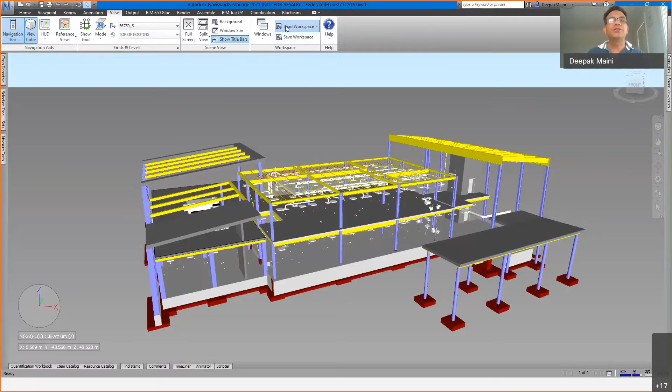And what I do from here on is I look at all the clash results that have been added to this file. So I'm going to go OK here. Let me move this folder out of the way. I'm going to go into the workspace that I've created for my clash detection. All right, so I've got all these different clash results.

If I go into, for example, structure versus mechanical, and look at my results window, I've also grouped all these clashes, so I can see them grouped as well. Similarly, if I click on structure versus plumbing, I'm looking at all these clash groups. So this one here is telling me that there are these 3 clashes and other clashes and so on.

So as I'm working on these clashes, if I need to have a communication about any of them, what we would do is, from Bluebeam Studio projects, pick up this PDF file and add it into a new session. As you could see, I've already got a session running for structure versus mechanical. I'm going to add this to a new session, and I'm going to call it structure versus plumbing.

So what it's doing is taking this clash report that was added into the project as a PDF file into a new Studio session. And in this new Studio session, I can then invite people. So let's go and type an email address. So I've invited this person to start working with me on this PDF file.

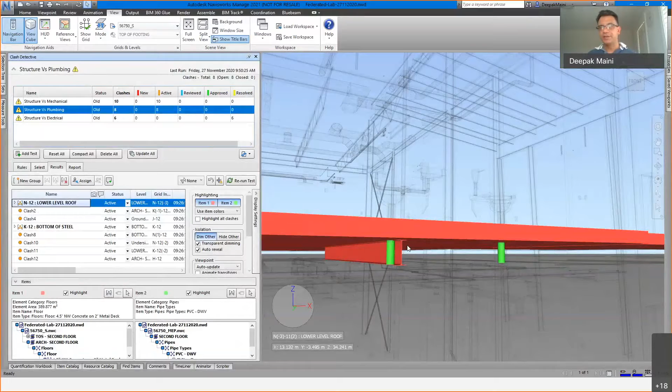So I'm looking at these PDF files, and as you could see, they've got the same clash groups as well as the individual clashes as I've got in my clash results here. So looking at this first clash, I can see it's between this pipe and the slab. And I want to say that these are valid penetrations, and we have decided not to model the penetrations in this project.

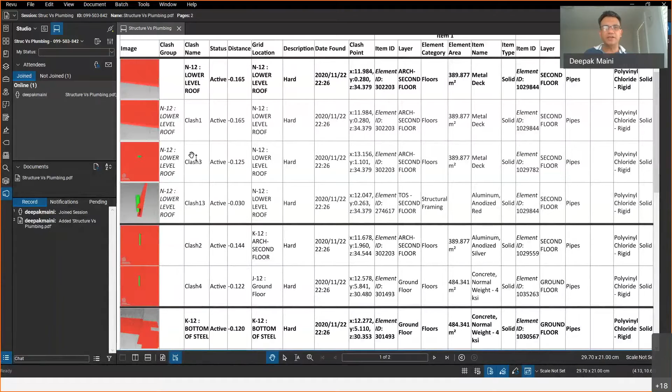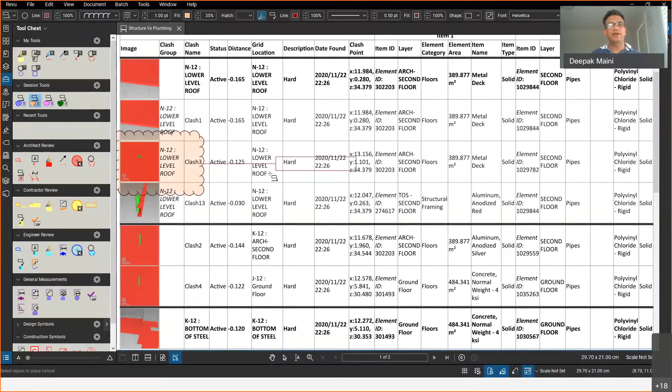So I could simply go into this PDF file here and start adding those markups. I'm going to go into my markups window here and pick my markup tool. Because this is plumbing, I'll pick the plumbing markup. And I can now add a markup here, and then add a comment: This is a valid penetration. We aren't modeling it in this project. So this is a markup added.

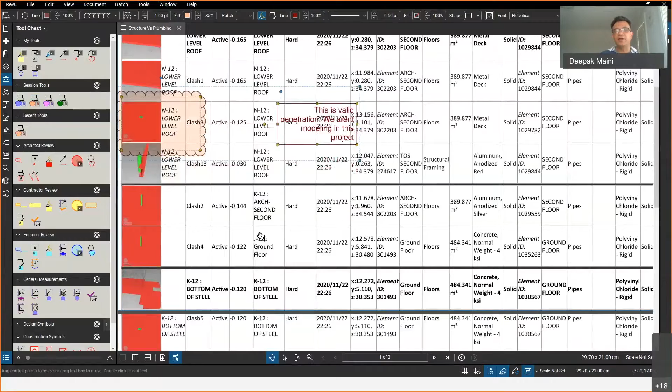Similarly, I can resolve the other clash. This one is again a valid penetration, so I could do the same thing with this clash. This clash obviously is a problem because it's with a piece of steel. So I can go into my model, move this pipe here, and then go into this particular markup and say: Pipe moved, changes will be reflected in the new model.

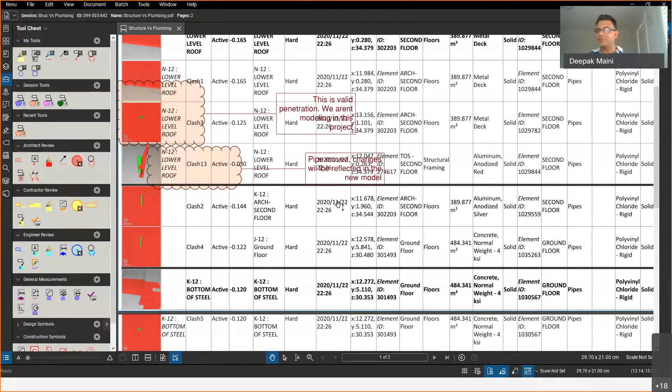So the whole idea is I've got this one single source of truth where I've got all the information that I'm adding, or any communication that I need to have with the BIM manager or the VDC manager about any of these.

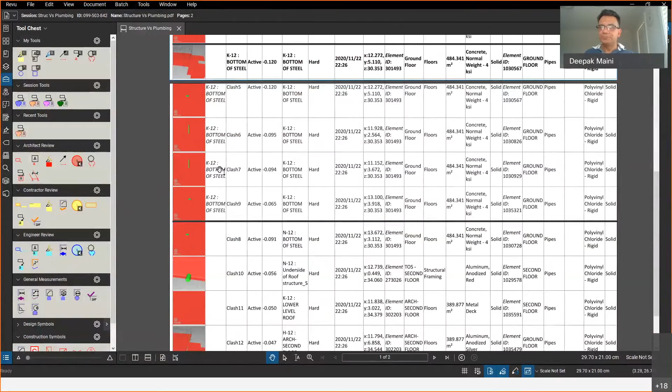Similarly, if I've got any other problems, I can start adding comments here. But most importantly, this combination of Studio Sessions and Studio Projects is ensuring that I've got a single source of truth for my Navisworks NWD files, because this is a read-only file, I can't make any changes to it. And at the same time, I've got a single source of truth about my communication as well.

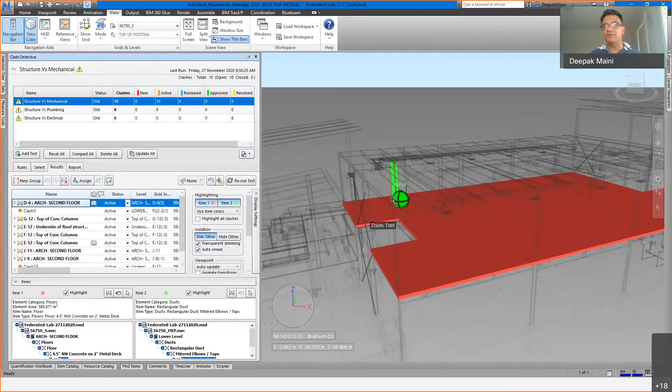Similarly, let me close out of this. If I go into the other session that I've got running, I'm going to leave this session. I can go into the structure versus mechanical session. And again, I can open this structure versus mechanical PDF file, look into the structure versus mechanical clash results, and start working on this in the exact same way as I've been working on the structure versus plumbing test.

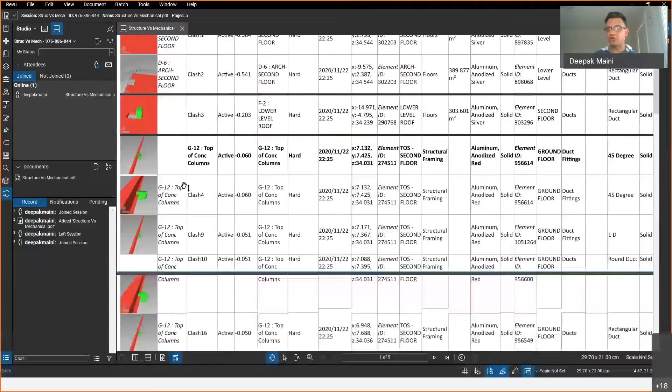So again, the whole idea is I've got everything that I need in one single location in my Studio Project. And any communication that needs to happen can happen through Studio Sessions. So that gives me, as I said, a single source of truth where I could have everything sitting in one single location about communication, about the project, or even the source files. And the best part is when you're creating these sessions, let me just go back to the structure versus plumbing session.

So I could go into my iPad. Let's say I've added another user here who can start marking up, and I'm going to use my iPad for that. I'm going to join a new session. So this session ID is 099503842. Join. Now, the reason I had to punch in the code is because I did not have email configured on the iPad. So you can see here that this user now has got this file opened, and I can have this user start adding some markups and comments as well.

So let's go to this one here. I'm going to add some comments here. Let's use a generic tool. I'm going to place this valid penetration again. So as you can see, even this user has now gone and added these comments.

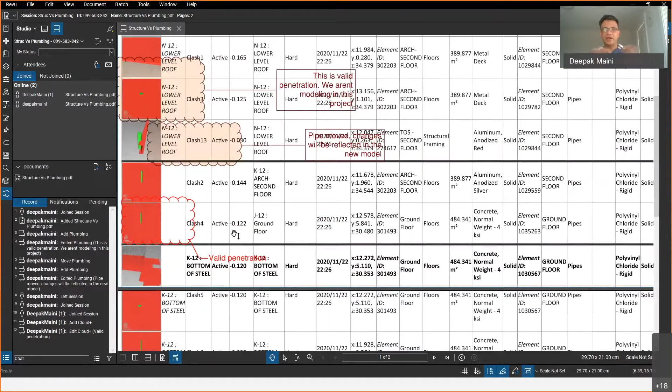So the whole idea is it's a single source of truth when it comes to any communication about this particular clash result. I don't have to worry about adding comments in the NWD file and then sending the NWD file over to the BIM manager or the VDC manager, and then they're keeping track of it and losing it along the way. And once we are done with this communication part of the clash test, I can then finish this session, and I can generate a report.

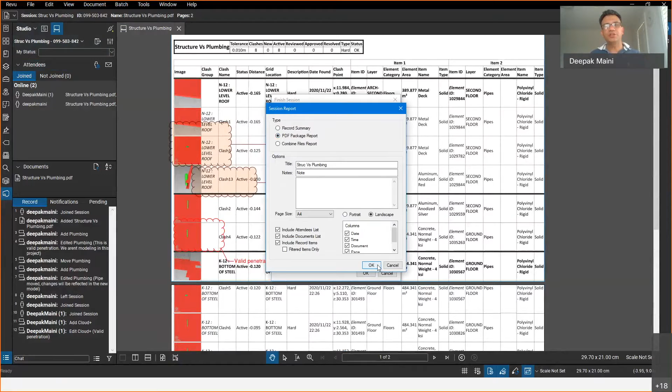So let's go and finish this session here, and say finish session, I want to generate a report. So I'll go to report settings. I want it to be a PDF package report with all this information. And I'm going to say OK. So what it does is it generates a report for me as well as a PDF package. And if I close out of this, I can go into this PDF package report and I can store this.

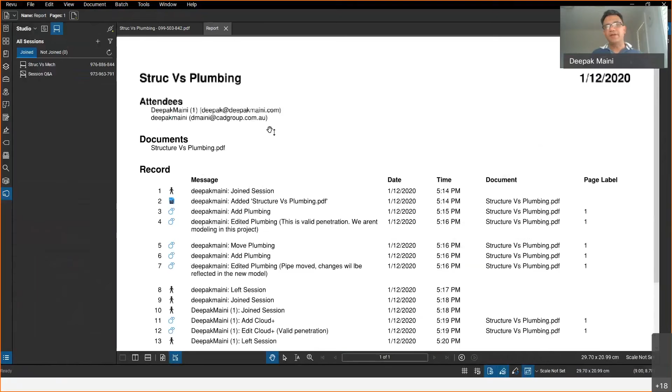So six months down the line, if somebody needs to discuss, we talked about this particular clash but it wasn't resolved, we can straight away go into this particular report. I can look at the report here, or I could just open all the documents and look at this PDF file. And I can say, all right, this is what was decided because it was a valid penetration. That's why it wasn't modeled. Hence, we decided not to resolve these clashes. So in the clash test, I can simply change the status of this to approved or reviewed.

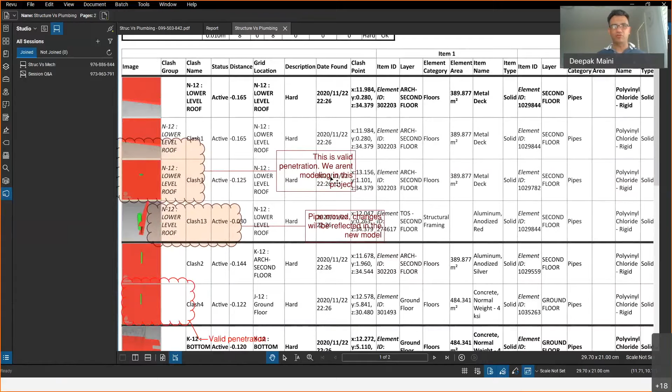So again, the whole idea is we don't have to worry about sending the communications through emails or by adding comments in the NWD file. Everything is stored in this one single location for us to review at any point in the project. Most projects would have BIM managers or VDC managers who already have access to Bluebeam Revu. And the best part of this entire process is that only the initiator of your review sessions or projects needs a license of Bluebeam Revu.

Anybody who's added to the project or the sessions does not need a license of Bluebeam Revu, which means that everybody who's communicating with me on this particular project or clash result does not need a license, which means you can save project cost. You don't have to have those expensive products like Revizto and BIM Track and BIM 360 and so on. There's no additional overhead on the project, which makes everybody happy. But at the same time, it is doing a fantastic job of keeping everything in one single location as your single source of truth.

So that's all I have in my presentation, pretty much exact on time, about 15 minutes for my presentation. I want to open this for questions, if you guys have any questions.

Deepak, yeah, I've just got a bit of a question about Studio. If you just have normal Studio sessions where everyone can read and write, is there a way to set it up so somebody else can edit my markups, like everyone can just edit everyone's markups?

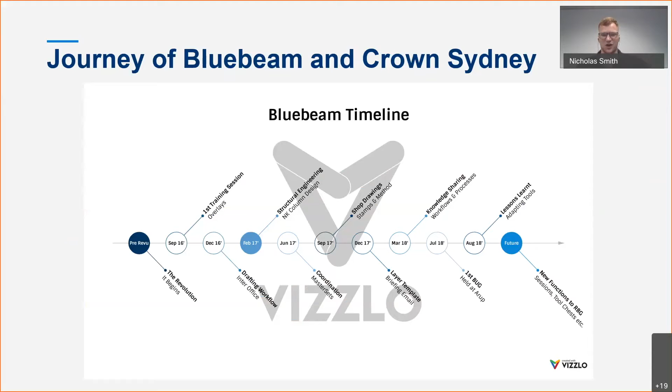So when COVID happened, it was really a culmination of all this, and for the whole design team, you had to adapt or die in the coordination room, because everyone started doing this. And what we really benefit from as structural engineers is the ability to communicate effectively and clearly through sketching, and how accurate you could make these markups. You're able to communicate your ideas so quickly and efficiently to site. It really allowed the construction before COVID to continue at a rapid pace. And then during COVID, they were still working on site, but everyone else was working from home, and they still expected that same level of service.

And definitely with Bluebeam, it was that tool that enabled us to keep working at that high pace, which was required. Especially when COVID happened, they wanted things quicker, they wanted things done fast. There was the big worry about what was going to happen, and we really did have to up the ante around the design team, between the architects, the client, and all the consultants, and just digitizing.

We had site inspection records there, but turning everything electronic. Back when you were in the office, you could get away with having that paper markup. You could get by. It wasn't a must-have. You've got to have everything digitized, but it really benefited the project, and definitely the project teams that had already evolved to use this tool. It allowed them to succeed or transition quickly to remote working, and the benefits of that definitely shone through.

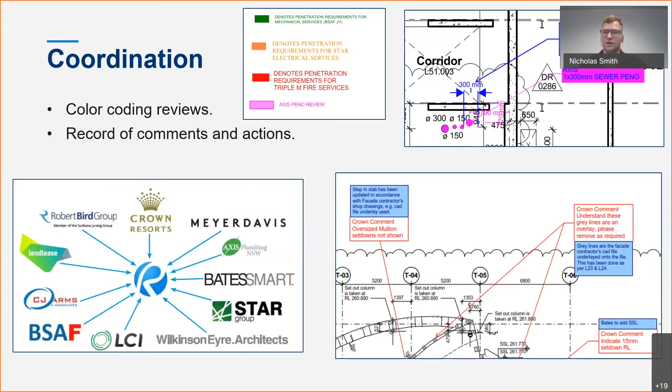But especially if you're just starting out on this, you just need to find a process that works for you and your project. It doesn't have to have all the bells and whistles. Find a solution that works for you, and then chip away at improving it and slowly evolving it, especially when you're trying to get a whole team to buy into it. We had to chip away at certain people in the team to get them to invest their time, and we were investing our time into getting not only our internal design team but also the wider design team pushing in the right direction.

So obviously we had the disruption, and we were still able to complete, and it's soon to open for everyone to go and enjoy, hopefully. When doing the webinar with the B1M and Bluebeam, I was thinking about what that was like when the disruption happened, and what changed. There were a few things: revisiting the training and the online resources. I think we had a few more trainings just to make sure everybody was up to speed with Bluebeam.

We were revisiting and reviewing existing workflows. Did they work? And really, communication is key. But I found on an individual level it was even more important, trying to talk to your whole team individually. I've got an image here of the designer, the approver and the drawing sign-off. They would do a presentation and it's supposed to be in their tool set. Nobody would be telling you whether their tool set's updated or they got the drawing sign-off.

It was only through communicating with them, seeing how they were doing things, having those team catch-ups while working remotely, to really understand: they had these presentations, they knew these tools were there, but were they actually able to use them? And then pointing them in the right direction of IT to get those things solved. That allowed for consistency across the offices and across the project. You're getting people to help out, and you want to make sure you're sending similar markups. You don't want to be confusing people, and having those tool sets and standards really helps achieve that goal.

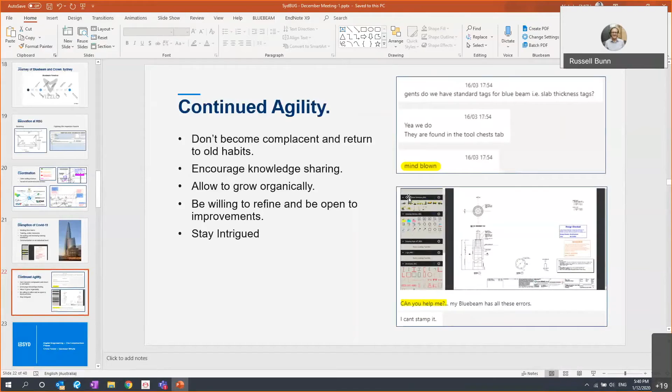Yeah, thank you, Nick. That's an amazing presentation. And just quickly sharing. How do I stop sharing? Got it. Oh, awesome. No worries. I'll try and find. Here we go. It's not that far in there. Right, thank you, Nick. That was really awesome.

Okay, on to our last segment for the evening. Chris Power from Seymour Whyte, which is his correct employer rather than what I had listed before. Chris is a digital survey engineer based in Brisbane, and he's done some fantastic work recently in creating LOD 500 models, which you may have seen on LinkedIn. A really good picture of what the future looks like, and certainly where we're all hoping to head going forward. So, without further ado, I'll hand over to Chris.

Thanks, Russell. Can everybody hear me okay? Yep, that's great. Well, I'll share my screen then, if I can find which one it is. Cool, I can see you now. Yep, all good.

Yeah, I've had a bit of a different journey to BIM, really. I started with BIM in 2018, and I had a discussion with a man from Transport and Main Roads in Queensland, who was charged with implementing BIM because the government said all the major projects have to have BIM by 2023. So he was the man to do it. He came to me and asked if I'd be interested in being involved in a pilot project for linear infrastructure. This is the M2VL, that's Mudgeeraba to Varsity Lakes.

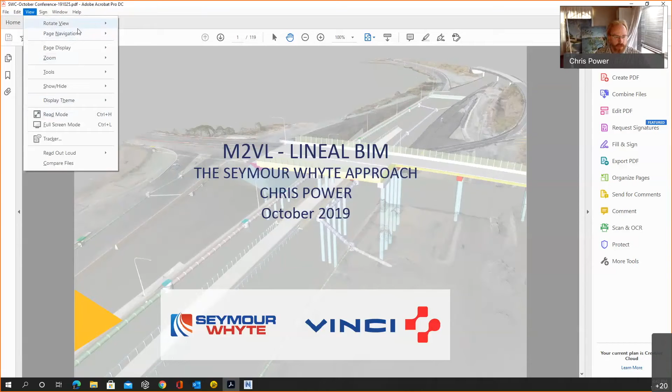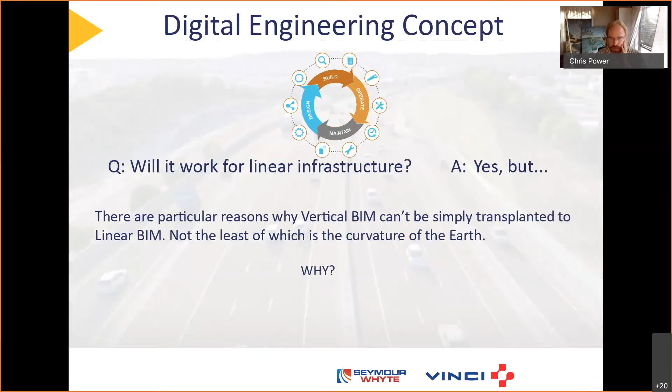I don't think we need to get bogged down in the beginning, other than to say it was Seymour Whyte and Vinci that drove it in the beginning. We got a lot of help from Vinci out of Paris. They provided us with all of the answers that we needed because they're doing them over there as well. And I was surprised to find out that England, France, and the US are really at about the same stage as we are in linear infrastructure. So nobody's really ahead of anybody else at this stage.

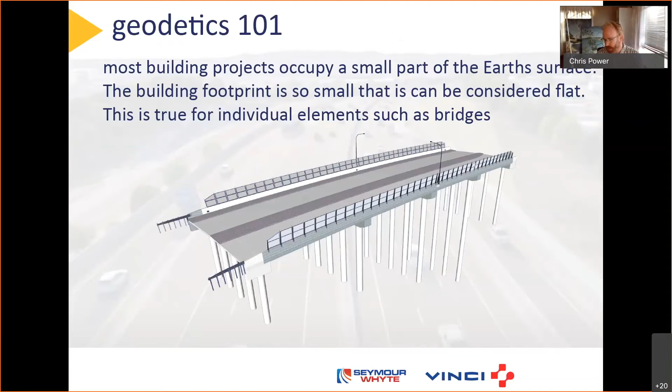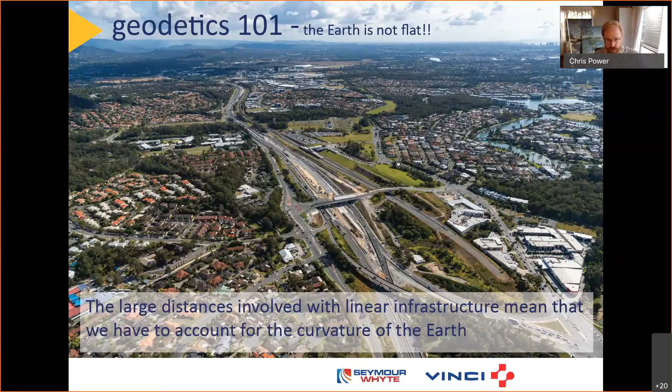I put this slide in because I wanted to highlight the fact, particularly since there's probably a lot of designers around, that with linear infrastructure we have to take notice of the old survey problem of the curvature of the Earth. In this context, we use a lot of GPS-based tools like machine control to do bulk earthworks. And most of the designs are actually provided in UTM-based projections, so there's scale factors that have to be taken into account. Whereas most of what I've seen in the BIM space is the old 3D Cartesian plane. So there's an option for that.

There is actually one that is a true 3D. And this is just a little bit of a plug. I don't expect Autodesk is going to jump into this anytime soon, but there are options for true 3D. There's the system ECEF, which keeps track of satellites and handles the GPS system, which is a true 3D view. If you zoomed far enough out from your work, you'd actually see the curvature of the Earth, and if you kept going, like in Google Earth, you'd see the whole world. And at that scale, everything's 1-to-1, so it's a true distance. So anyway, that's the end of my plug.

But these are the sorts of tools that we can use out on site with GPS, once we've got those scale factors sorted out. This is showing a 3D model overlaid on reality in real time. This little device is a GPS system that works with your phone, so you can load up an IFC of a bridge and see how well it matches or what it's going to look like before you build it. This is quite popular with supervisors, getting towards the hard face of construction. They're really happy to use these tools, and the project managers obviously don't want to pay for it, but it's good to see them starting to emerge.

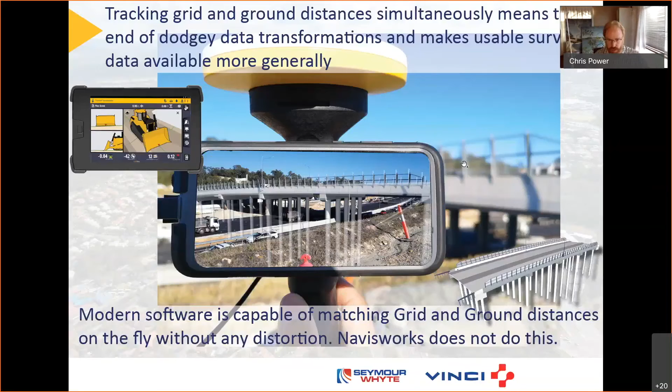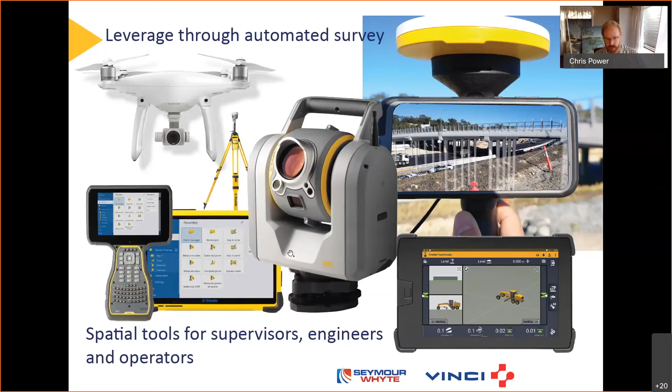We were using this for a while, but we've switched over to an RTK version. The little white one, everybody probably knows the DJI Pro or whatever it's called. There's also a version with a little bump on it, which does RTK surveying, which gives us another level of accuracy.

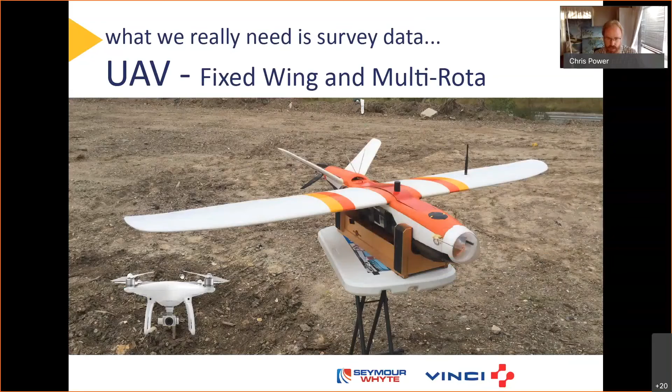So we've actually moved into the RTK space at the moment. And we're using Trimble Stratus, it used to be called Propeller, to handle all the processing. So really all our guys have got to do is upload their photos and the control to this site, and it gets processed overnight. We've got over 500 users on our account now, and nearly all of our jobs are using this in one way, shape, or form.

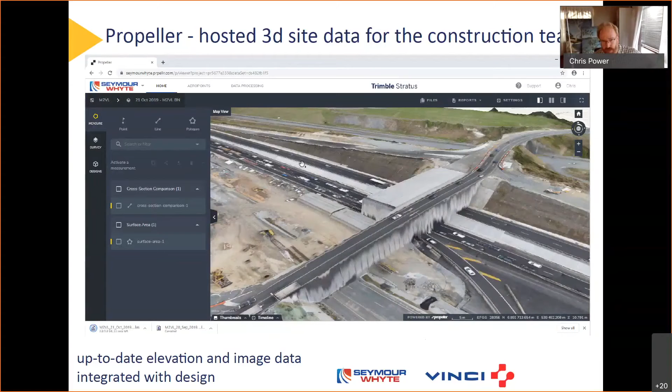We've also got the internet-based machine control, so it's not the old broadcast over a radio anymore. We can target who we're giving data to and who we're getting it back from. That's a key thing with IBSS: it's two-way data. So while the machine's out there, they're collecting data, and we can transfer that back to the office.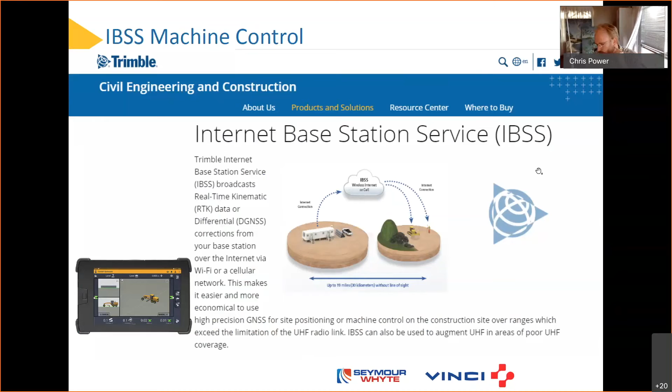So say, for instance, a surveyor has missed something, maybe something's been uncovered and then recovered between the surveyor being there, then we can go back and find out what the true level was. That was the actual excavation. So we'll just jump into what we do with this thing, I suppose.

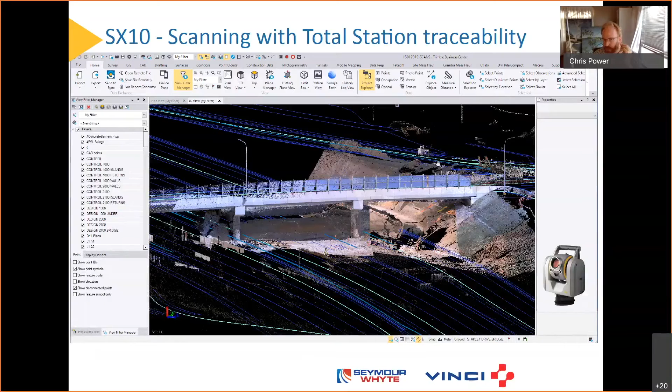So I guess for us, the advent of IFC gave us another way to set things out in the field. The field controllers can take IFC directly. That's the whole bridge just sitting in the controller. So in there, what they do is they go in and identify what points they want to use for set out and create points for those.

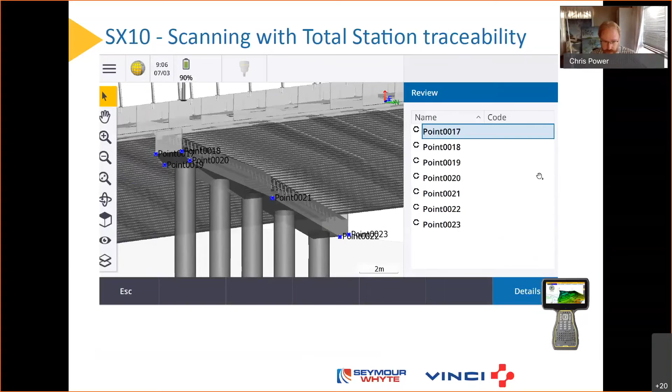And then it's just exactly the same as a normal survey set out. So there's no learning curve for these guys. They're basically 10 minutes and they're up and running with it. So this shows Trimble Business Centre. This is part of that same bridge there that has had some scanning done. The vectors that you see are just the control vectors, so that's all the setups that they normally do anyway.

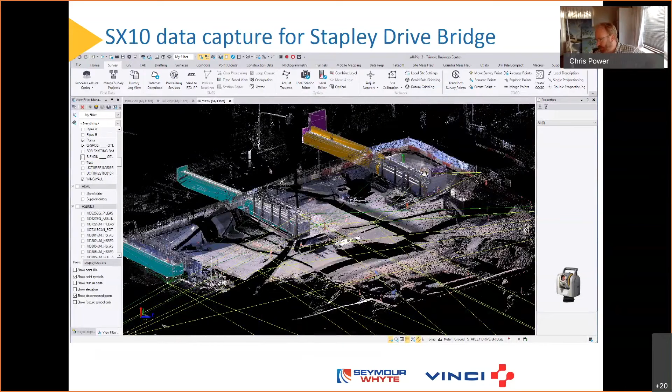So we zoom in there. Our first quest was how to map these and make solids that we could compare to the design. So what we did was basically clean that up, which is always the first port of call with a scan data set. And after a few iterations and trials, we worked out how to actually get 3D face sets out of that based on survey data. So we can actually embed the raw survey into it.

So currently what we're doing is surface to surface conformance, just to check that it's actually where it's meant to be. But we're working on a system where we'll do conformance just from the scan itself. So we should be able to just get a cleaned up scan of, say, an abutment or something like that, and the IFC design for it, and just tell the software to compare it and give us a heat map of the result. And that more or less should be an automated process.

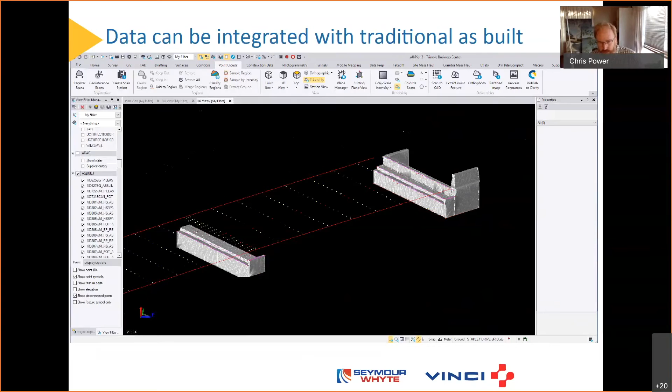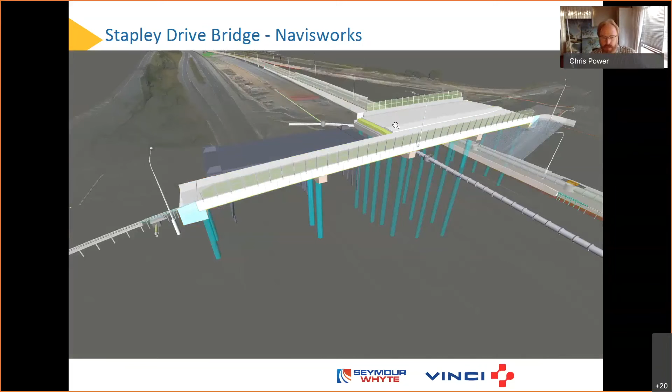This basically shows how this bridge was built in the first stage. That's using all the survey data, and there's a little bit of the point cloud in the background. So this is probably just before they demolished the old bridge. They built most of the new one around it and then demolished the last bit there and filled that up. But we'll have a look at that model also when we get in there.

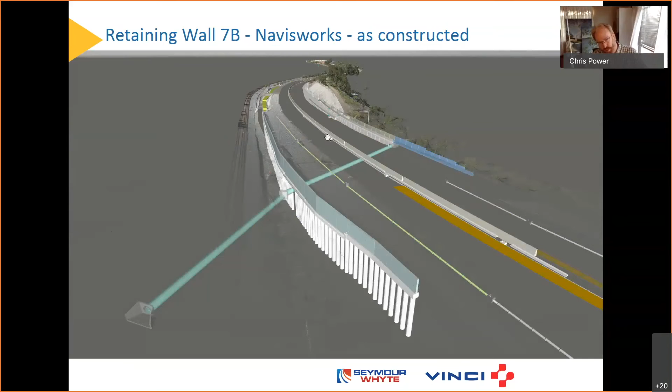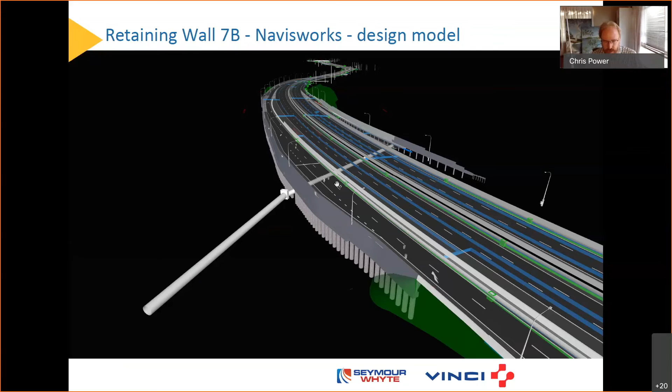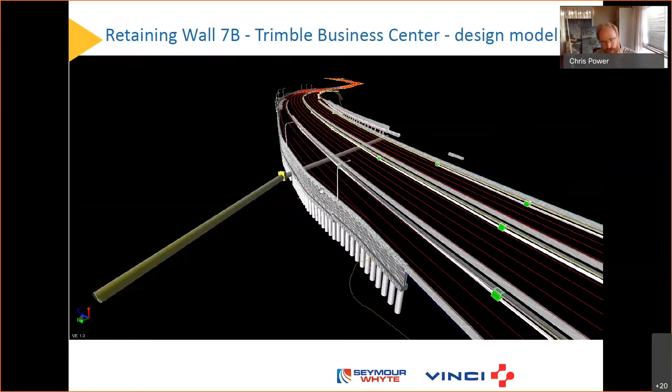So basically, we put that into a survey system, which is a picture of it there, and then we could design the temporary works. Because we need to get a piling pad down here, we needed a certain width for it so that it could operate, but there wasn't actually enough room there. So we had to overpour a lot of those piles and cut them back again. So you can see once you get down to the level that you're actually pouring the pile cap at.

Sorry, my apologies.

Pardon me. So when you get down to the level where you're pouring the pile cap, you've got much less room. So that's the space that there was for the pile rig, and that's the space that there was for the contractors to get in there. So these surfaces did end up going straight into the machines. So it's good to be able to have that continuity from the BIM platform straight into the machine. So that's what we're aiming at.

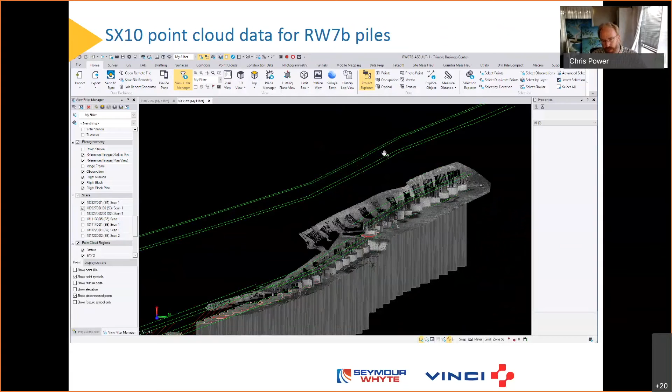So this one just shows the progression of part of this wall. So that's the pile caps and then the piles and the pile cap, and then the blade walls after that. So that was the basis of a model that was used to compare to the design model. But what we found was that we wanted to marry it up with the QA system. So we really needed it to be in the same format that it was actually built in.

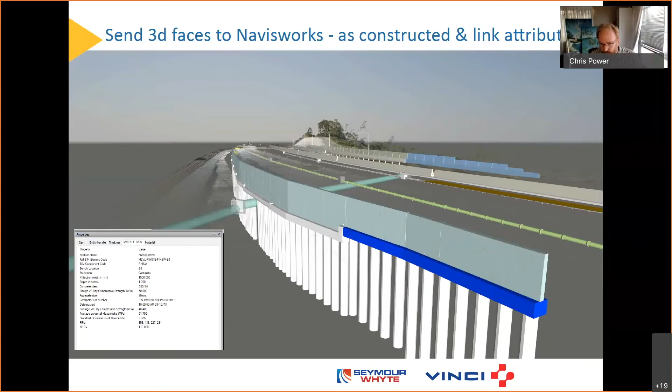So rather than having all of that piece in, basically it's a survey accurate 3D GIS, because it's all of the attributes that are required by the client, all just sitting in spreadsheets behind that. Whereas the design actually came up like that. So that one piece was the 300 meters, and it was over 100 lots. So it wasn't really lot ready, and there wasn't at the time a simple way to cut it up.

And we did use it to compare with what was built, but it wasn't able to really form the basis of what we provided the client. So that's what I mean about becoming lot ready. Now, I know a lot of you are working in vertical infrastructure, and this is more of a linear sort of thing, but anyway, it's a bit of an exposure to linear for you.

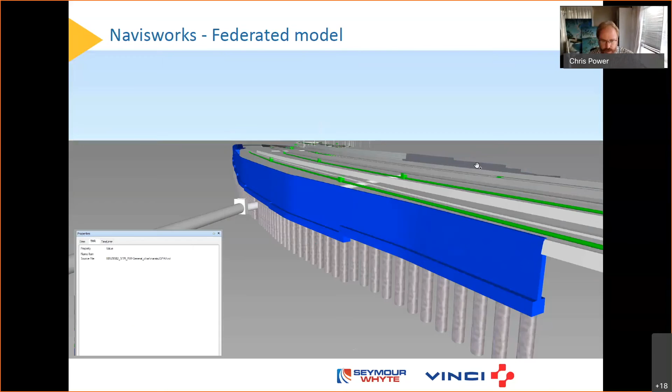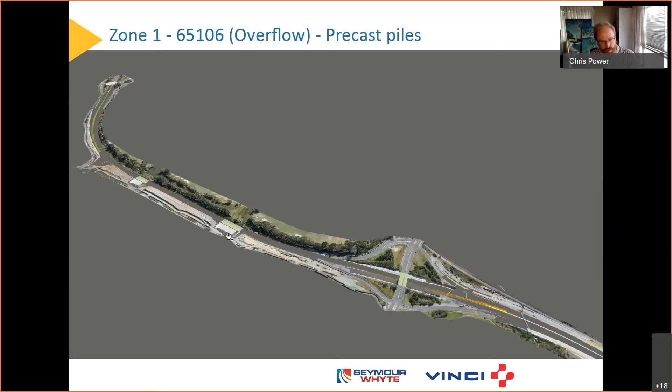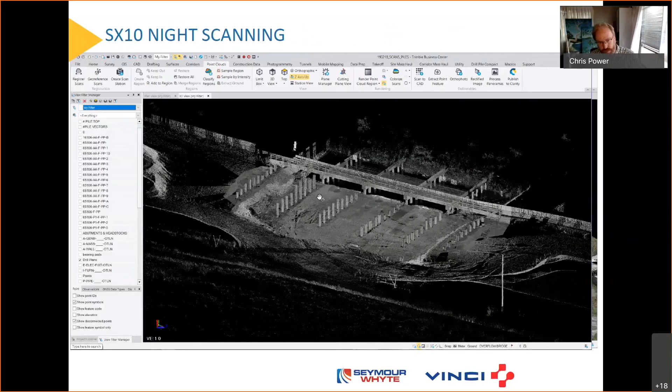So this is the whole project. It's cut into 3 zones. One of the other things we came across was up in zone 1 here, and we had 2 bridges running across a floodplain. So there was a main creek bridge and also an overflow bridge. So in that overflow bridge, there's an example here. This is SX10 data, so that's terrestrial scanning of the driven piles. So you can see these light blue, purpley ones.

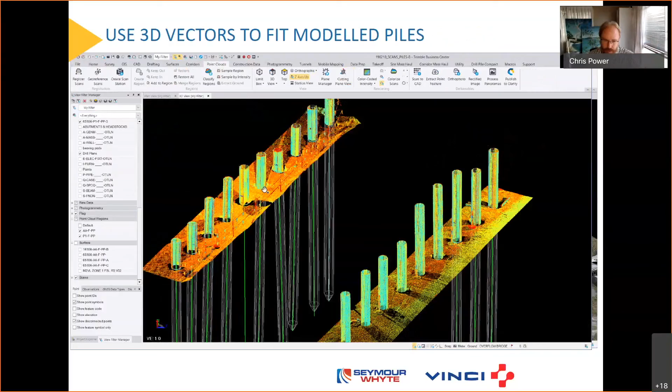That's the design piles. So we found that if we took one of those, we could fit a vector to what was remaining outside. Because they're a known size and shape, we could accurately detail where the toe of those things actually ended up, which is something that the administrator or the contractor had never seen before, and now it's on evidence. So whether they blame me or not, I don't know. We did get it started. It's a known geometrical shape, and we can fit that in and produce a vector to show us where the toe is.

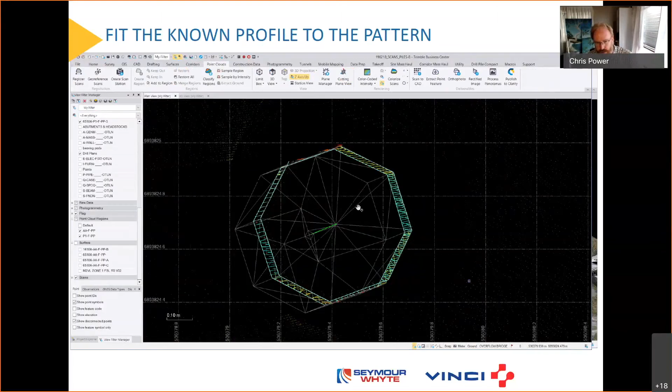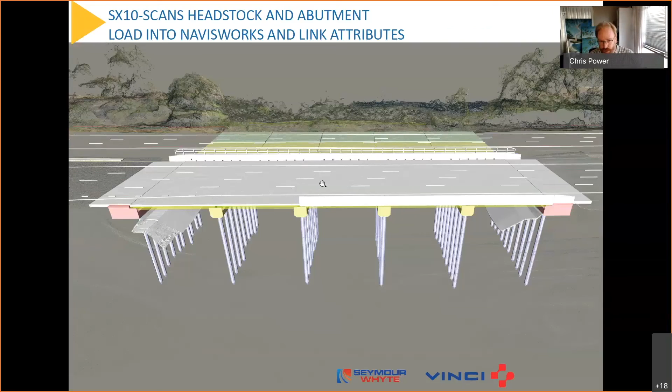And I know you're probably going to say that doesn't comply, but there was actually an existing pile that ran down through there on an angle from the old bridge. So that was allowed in the end. Likewise with the substructure, we just went through and worked out ways to produce the 3D face sets straight out of the scans, and then match them to the design. You can see the slight rippling effect in the surfaces there. That indicates that the scan data is actually embedded in that surface, creating the nodes or vertices of the mesh. So it's as true a representation as you can probably get at the moment, I'd say.

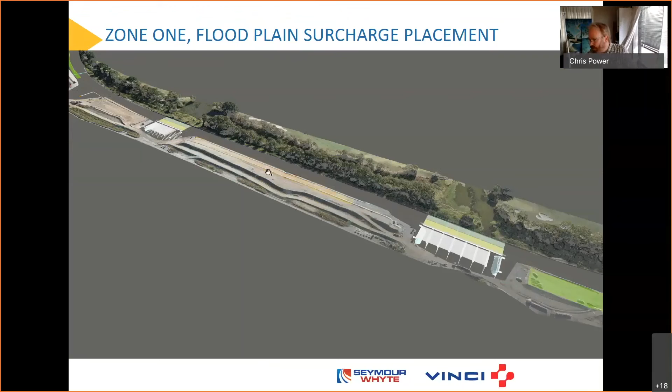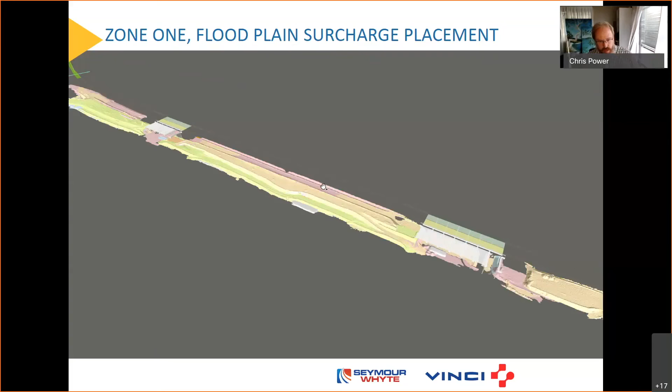We also used it to monitor surcharge. So when you get into mushy ground, you pile it up with a whole lot of dirt to make sure it stays where you want it to stay. And that happened over a few months. So we just used the UAV passes to create different surfaces, and we made the 3D face set objects out of that, and they stored the information within that set. So it's not a bad way to keep track of things, and we also used it for drainage.

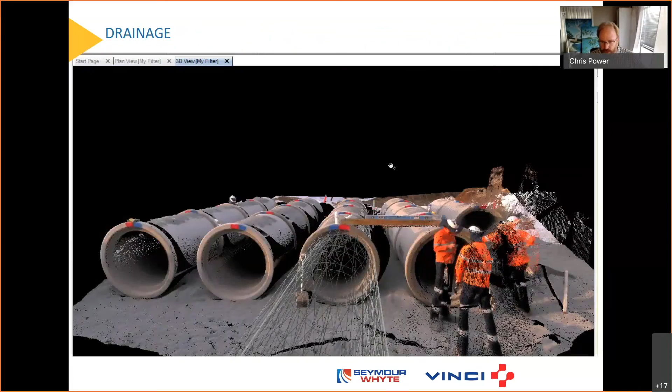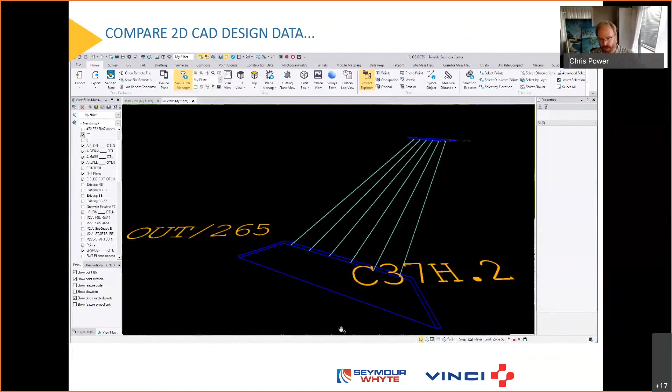So I often show that one because people think it's a photograph, but it's not. It's a scan. You can see maybe this guy sneezed or something, I'm not sure. It was used to check the geometry was correct with these. This is a culvert, obviously. So this is what the design came in, 2D. And that was what was given to us by the designers.

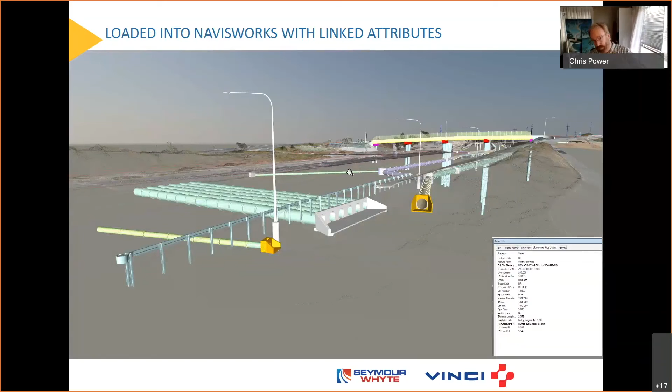So that was transferred into using the standard drawings to create a set out for that. And then once it was built, that was scanned, and the scan became the new solid. And then that's it sitting in the model at October last year, basically. So it's moved along a fair bit from where that is now. So you can see that was still when that piece hadn't been put into the puzzle.

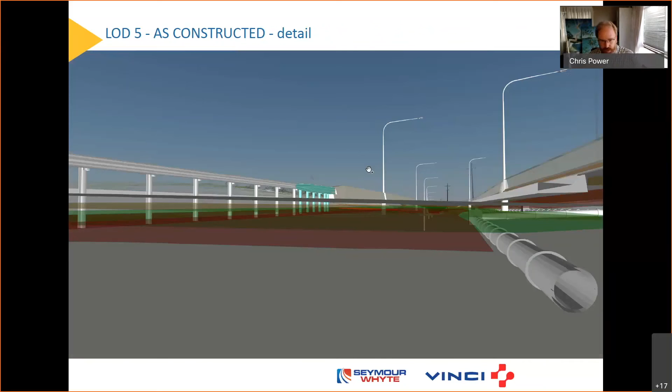So basically, if you use this sort of approach of using the UAV data, it does provide great context, and really makes these models really easy to read. So that's just to show that we had all the pavement layers in there as well. So we got to about that sort of,

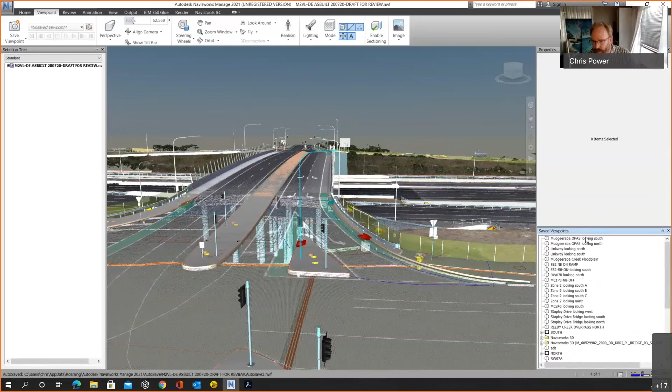and since then we've come along a little bit further. So that's that same area that's actually finished now. So I'll just run through a couple of these so you get a bit of a feel for it. So it was sort of a bit darker. That was the final one. And it was about 6 o'clock in the afternoon when we flew that one. But as we go from north to south, you can see the daylight's coming back into it.

Basically, the goal was to get it to reflect the QA system, the QA database. So everything that's here has got all of its information, so we know what data was actually installed and all the rest of the data. There's schedule data, which is design. So I think the idea is that you have design and you have construction attributes, and then you have your linking attributes and all of this as well.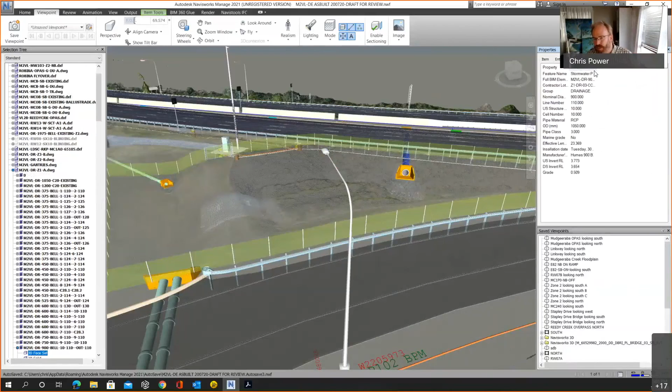So really the trick is to get it all singing together, which is a bit of a work in progress, because I think I might have mentioned that I kind of started at the end. So now I've gone back to the beginning of getting it working with the estimators, and the next step after that will be to get it back on site with the communication.

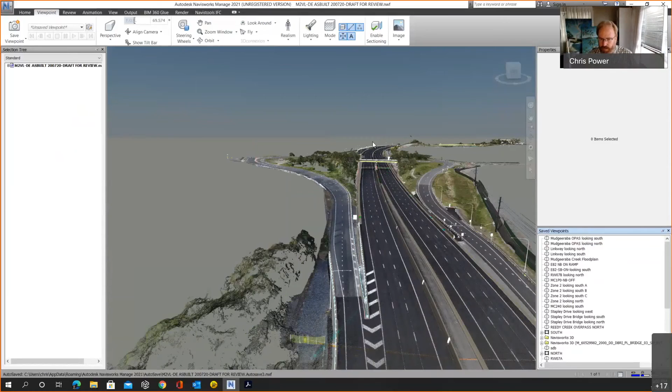So Bluebeam's got the roles set up, so you can check data out and check data in and move it around and get all the authorizations. We'll probably do the NCR system that way as well. And so, yeah, at the moment, it's really just a bit of a check on design. So we've gotten to the point where the client's more than happy with the output. I think we've given a puzzle for the survey department, because they're now trying to work out how on earth they're going to specify it.

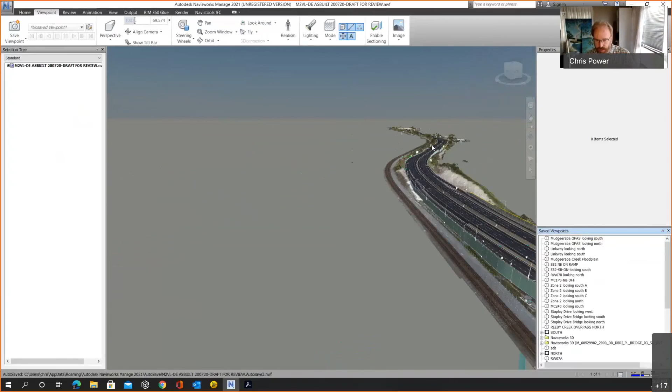And I'm just missing a piece of the puzzle there. But being 5:02, it's probably about time to open up to questions. Hopefully I've got some, because I'm sure I haven't covered everything, but there's still a lot going on in this space. Like this isn't completely finished.

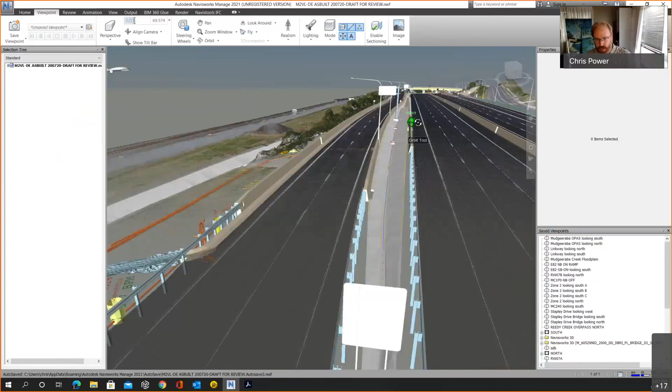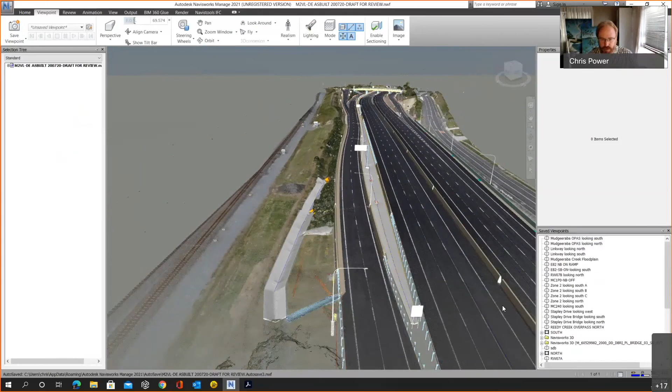This is piecemeal, but that's because that's live electricity, and really the only data we could get back from that was survey data. So they just do test pits. So that's all you really can have confidence in. So there's probably quite a bit of electricity through there, but it's the same old problem that the Dial Before You Dig data is terrible, and nobody's going to take responsibility for it. So I think that's one of the things that really needs to get sorted out.

But yeah, I think modelling itself, anyone can do that now. It's gotten to the point where most of the kids with the games start out when they're 5 or 6, modelling in some way or other. So I think most of the people coming up into the industry now expect that all of this is already happening, and they're quite surprised when they find that it isn't.

But anyway, questions? Is anybody here?

Yeah, that's really awesome, Chris. It's great to see. So, obviously, did you hand this over to TMR? That particular model there? Yeah, this is the published model that they've got. That's why I can show it.

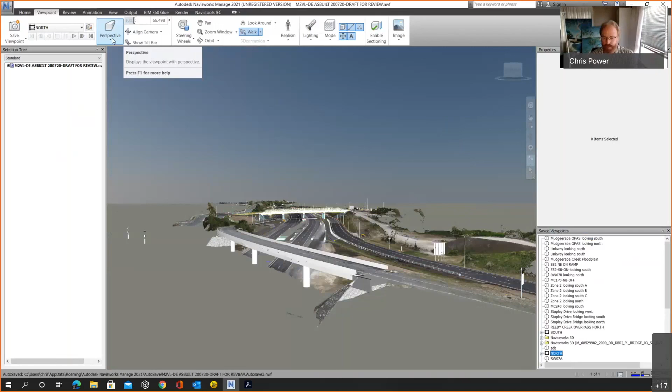So, yeah, we've got quite a number of other ones, but they're all still under wraps. You know what people are like in construction. They don't like giving too much away. But yeah, it's getting there.

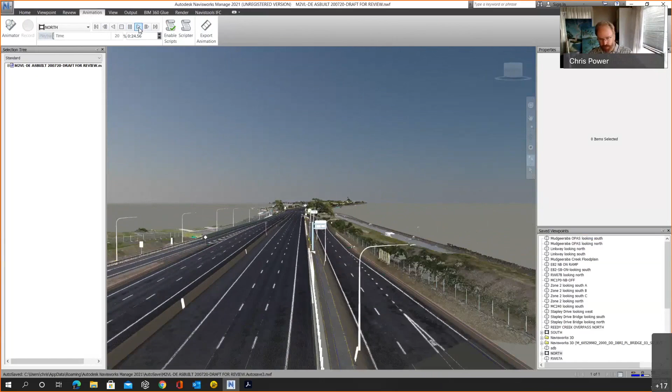So, yeah, I think there's a few coming up down south there. There's the Warringah Freeway and the Gateway, obviously. And I think there's a lot of talk going on about virtual reality in that space at the moment. So I think there's a bit of pressure on to get that sort of stuff under control. But I think that's just basically render farms, isn't it, Russell?

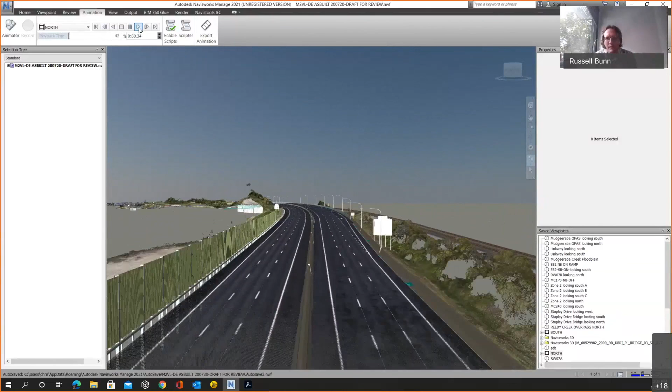Yeah, so there are some really big projects, and obviously Transport for New South Wales are pushing a big digital engineering framework. So that's going to inform, I would hope, a lot of this, and their projects are the scope that can take this sort of development as well. Yeah, they're not tiny projects. They're of a similar magnitude to what you're showing on screen here. I think it'll take a bit of time to get the specs right for it.

But at the moment, we're still at the stage where there's a lot of cultural resistance, and people are trying to get out of whatever they can at the moment. So we just have to keep up the pressure, I think. Indeed.

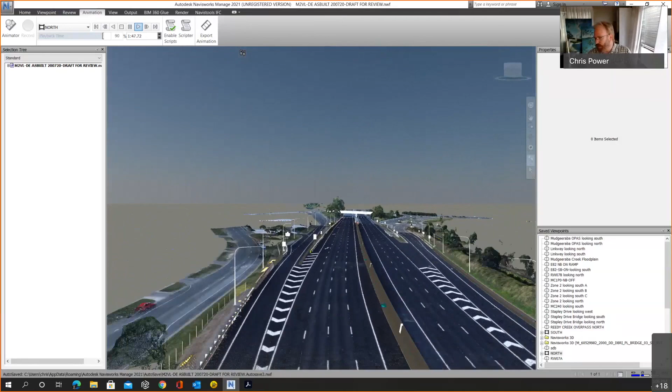Yeah, I think the takeaway I'd like to give is that digital engineering is a process, and design is a part of that process, but it's not the whole process. There's the whole life of digital engineering into the construction phase, and I think the only true way to get to a real digital twin is to get the site involved. Yeah, because they're collecting all the data. It's there, and they get all the changes, the last minute red line markups, all of those little quirks and adjustments. I think that's what we need to be capturing.